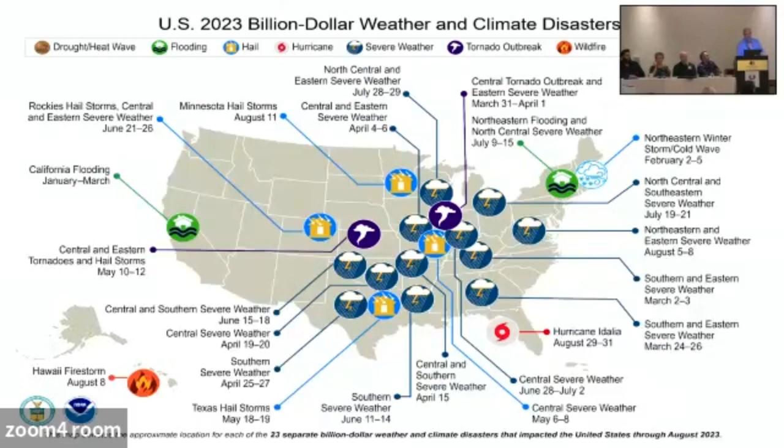We are working originally in the US and across the world, but we just need to work faster. Some of these things relate to rainfall, some are forest fires, we also have storm events. There's a number of things that are impacting us.

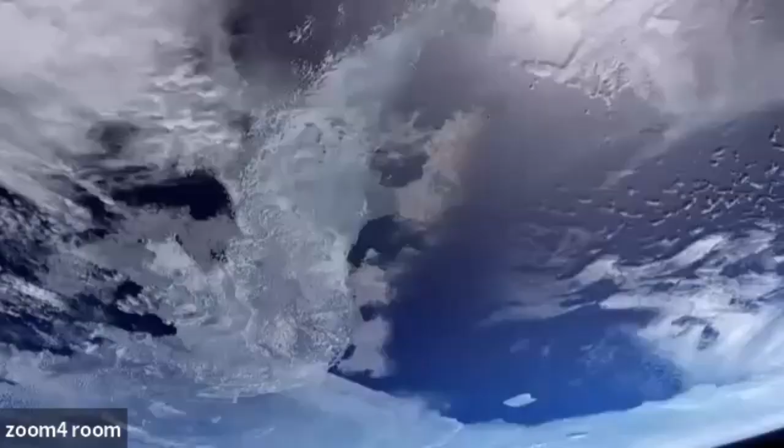So here's Mother Nature talking to us. Some call me nature, others call me Mother Nature. I've been here for over 4.5 billion years, 22,500 times longer than you. I don't really need people, but people need me. Yes, your future depends on me. When I thrive, you thrive. When I falter, you falter. Or worse. But I've been here for eons. I have fed species greater than you, and I have starved species greater than you. My oceans, my soil, my flowing streams, my forests - they all can take you or leave you. How you choose to live each day, whether you regard or disregard me, doesn't really matter to me, one way or the other. Your actions will determine your fate, not mine. I am nature. I will go on. I am prepared to evolve. Are you?

How's that? Ooh, oh, awesome. Thanks. Wow. Okay, I'm not Julia Roberts - tough act to follow, or Mother Nature, but so, who I am.

I am Joanna Papaevthimiou. I am the Oregon State Resilience Officer, which means I work in the office of Governor Tina Kotek, and I'm her policy advisor on disaster resilience and emergency management. I come to that work with a background in emergency management, 10 years at the city of Portland doing that work, and before that as a land use planner and community organizing around environmental justice issues. I want to talk to you today a little bit about housing resilience in the face of climate change.

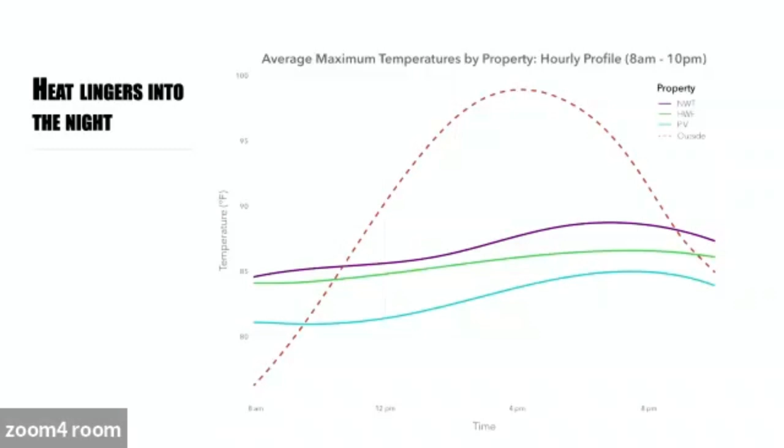No, that's really hard on the body, trying to not just put up with hot temperatures during the day, but also having to sleep through that heat. There's a lot of apartments that were experiencing this. So that was again the pretty strong takeaway for us, that this was really an issue to be concerned about.

And then finally, because this research project not only tracked temperatures inside the apartments, but it also was a partnership with residents, we shared temperature data with them. I'm not going to talk about the whole study, but I'll provide a link to it at the end. I think it's an interesting one. It was really a partnership with residents.

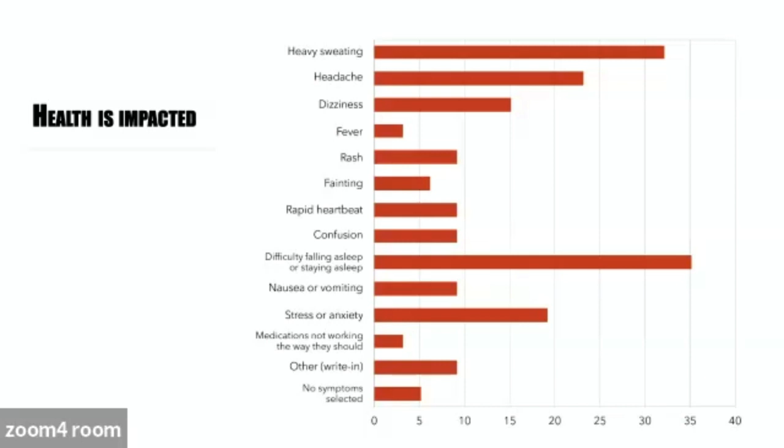So we also asked them about their strategies for coping with heat and how it was impacting them. And the majority of residents were strongly impacted by the heat, and people had trouble sleeping. People felt dizzy and nauseous, and also it contributed to a lot of mental health experiences of residents, because when you feel hot and anxious and you can't sleep, that impacts your overall well-being a great deal. So that's what we saw in these particular apartments, and it was really an important takeaway for us.

Also, as I said at the beginning, Shaylin and I and others came into this work coming out of the heat dome that I'm sure many of us here remember and lived through in 2021. We saw more than 90 heat deaths in Oregon due to the extreme heat that summer. That was such an outlier event for us. And so we were interested to see, to put that in the context of a more ordinary summer.

That was the following summer. But what we saw was that apartments are getting hot, really, not just in the heat dome, but apartments are getting hot in the summer, all summer long. And after that, I started paying close attention to heat deaths, and I imagine many of us did.

And what we saw is that, first of all, during the heat dome we talked about those 90 deaths, but if we look at excess deaths - people that are passing away, not that the heat is the sole attributable cause, but where it's a contributing factor along with other health conditions or underlying conditions - it's probably tripling the number of people that are dying of heat in the summer. And that's another reference I'll provide at the end.

So we could see that maybe not 90 people, but like 250 people died of the heat that summer. And if we extrapolate from that to other incidents, what we can imagine is that last summer, 14 people died of the heat, and already this summer, although the medical examiner reports take a long time to come out, we know there were 6 deaths at least in Oregon of heat this summer, and that doesn't include the excess deaths, just the ones that were attributed directly to heat. So that's a huge amount of people that are just having the worst impact from heat.

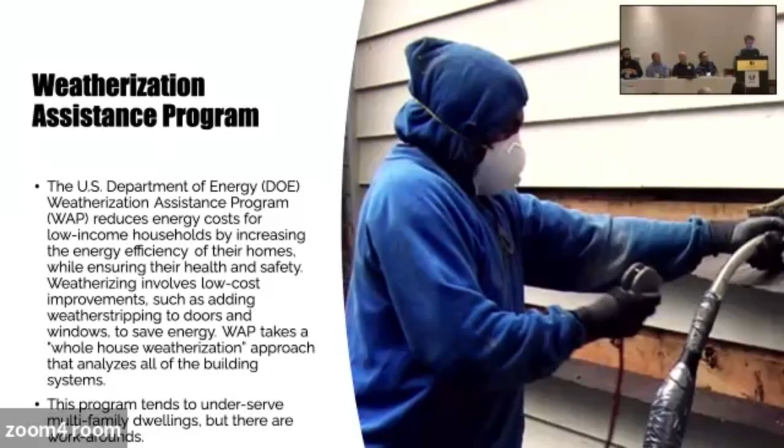Here in Oregon, the climate package that passed in the last legislative session, House Bill 3409, was a big climate package that included a packaging of incentives available to create healthy heating and cooling for all. The state of Oregon is doing a big push to put 500,000 heat pumps into housing in the next decade, prioritizing low-income and EJ communities, where that can have air quality and cooling benefits. It also brings down the cost of heating.

There's a whole bunch of benefits for people getting one of these heat pumps. And because installing 500,000 heat pumps is a lot of work—Shaylin can tell us installing even one can be a lot of work—it also has a workforce training program that will invest dollars back into the community for people to learn to do this work.

So I think those are all worthwhile programs. There's my contact info if you have questions or want to talk, links for the programs I talked about, and also the full report and some of the other research that I cited. I think I've taken up enough time. It was lovely to meet you. I'm going to pass it to the next presenter, which I think is Glenn.

Okay, following Julia, well, it's just hard for you. Following you was worse for me.

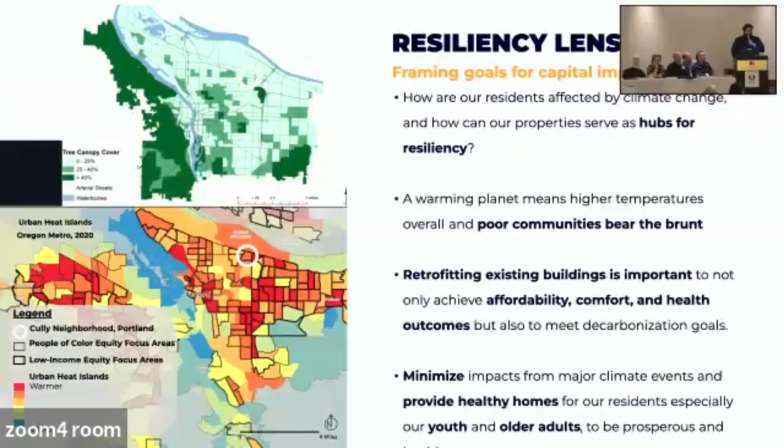So we wanted to do this exercise to look at a day in the life of one of our kids who live in one of our residences. So Julia's story - she's a 5th grade resident at Via de Rosas. She begins her day riding a fossil fuel bus to Scott Elementary.

I'm assuming it's a hot day, right? Even though it's late May, it's getting into the 90s because we know that warmer days are going to be happening sooner and sooner in the year. She's learning about the sun and that it can generate electricity, and she wants to become a scientist. She comes back to Hacienda's after-school program, Expresiones, and she's able to complete her homework in a climate-controlled environment.

At home, Julia is lucky because she lives in one of our properties that already has a mini-split system. So when she gets home, it's nice and cool, and she doesn't have to worry about the heat.

She gives her friend Bianca, who lives in Clara Vista Townhomes next door, a question about homework. She's wondering about a specific problem, and Bianca mentions that she's really struggling to focus on her homework because of the heat and how hot her apartment is, and she also struggles to sleep at night because of it.

So we're just doing this one exercise. We're realizing that one, there are inequities throughout Portland for folks, right? There's also inequities just within our portfolio, right? Just down the street, one child is having a different experience than the other. And that really imparted on us the need to upgrade these buildings to ensure that our residents aren't having to deal with these effects of climate change.

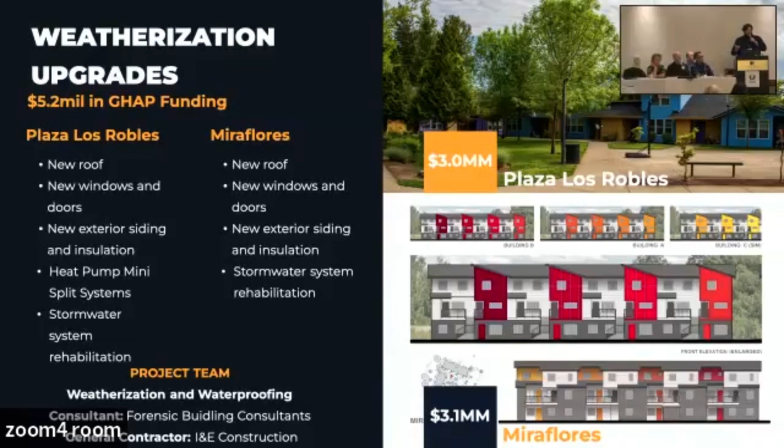And we're learning a lot by this in improving our existing properties, but we also are applying these same knowledge gathering and implementation into our new properties.

So Las Adelitas is a recent development in the Cully neighborhood that was completed in December 2022. It's all electric, it has rooftop solar, it also achieves an Earth Advantage Platinum, which I just know that we got confirmation today on. So that's great to hear.

But that was done a couple of years ago, and we're working on a new project, Dolores, in Hillsboro, and there's a lot more incentives that are now available, and also our own education is helping us achieve and identify more opportunities. So similarly, we're doing all electric, we're doing rooftop solar, but we know we want to generate more electricity.

So we plan to build an accessory solar structure as a carport. There's money now for battery backup, so we're looking towards that. And then also looking at Green Communities certification, just because it aligns better to our goals for this project.

So with that, I just wanted to say that these upgrades are really very reasonable and feasible for building owners to take on. You just kind of have to have the knowledge and the will to do it. So I hope that maybe you can take a little bit of inspiration back to your companies and organizations and build a more resilient Oregon. Thank you.

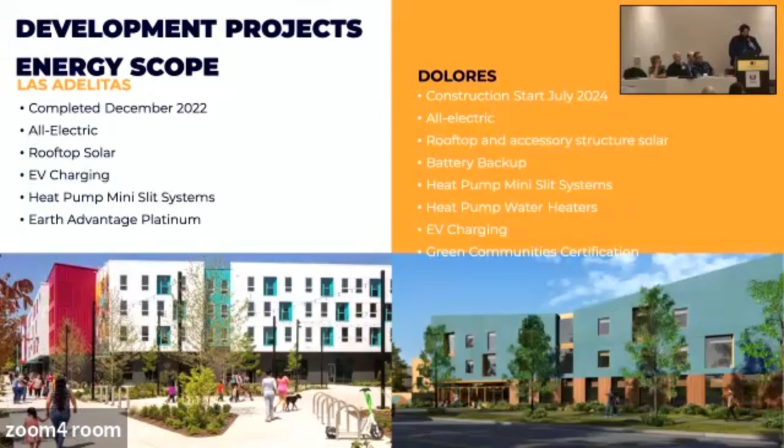All right, my name is Alex Boetzel. I'm with Earth Advantage, head of residential innovations there, but I'm really speaking to you because of my background as a builder, 30-year background actually. I want to talk a little bit about the strategies that lead us to some of those cool projects that we've seen, like the Hacienda does.

So quick question, who's involved in new construction, multifamily new construction? Any role? Okay, great. How about retrofits? And who has thought about resiliency measures in those endeavors? Okay, so it'll be a little bit of a recap, but I think it'll be interesting to see what do we consider.

And I'm going to skip over that intro, but what do we really need to consider when we talk about resilience? Because if you really pose that question, everybody has a different opinion on what that means or what we are really trying to address.

So here's what we've heard about needing to address: natural disasters, climate extremes, utility outages, health and safety, community well-being, long-term viability. All that is a concern, but really, when you set out to look at a project through the resilience lens, what are we really talking about?

So duration is one. Life safety and evacuation during an event—building codes take care of that now. But if you have existing buildings, will people be able to evacuate safely? Is that the duration we're talking about—just trying to get people out of the building?

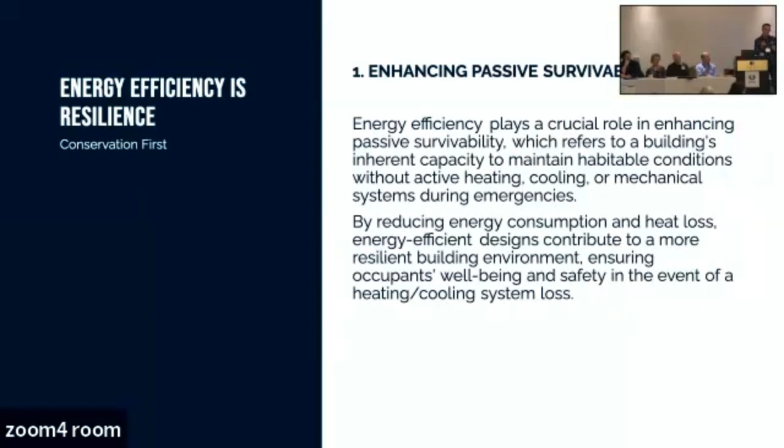So the idea is, if we have passive measures—and we're talking about what those look like—and reduce the impact of the weather on the building, we save energy and we become more durable and more resilient.

So once we've addressed all the passive measures, now we can talk about active measures. So that's equipment, right? Now we prepared actually for the really efficient equipment. Heat pumps - who's familiar with heat pumps?

Not every building can we just swap out the equipment, like gas boilers for heat pumps. We have to get existing buildings heat pump ready. In new construction, we have the opportunity to plan that in. But really, we have to address those efficiency opportunities around the enclosure first, and then we can talk about equipment. In addition, by reducing load and the draw of the equipment on the grid, we extend the capacity of the grid in severe weather events or other events.

So not only will we be able to better weather outages, but we might prolong periods before we even see an outage. You might know we have a certain draw on a power line, the power line heats up and sparks fires, and then we have a power outage. So we play better with the grid, meaning there will be more periods of time where the grid doesn't go down.

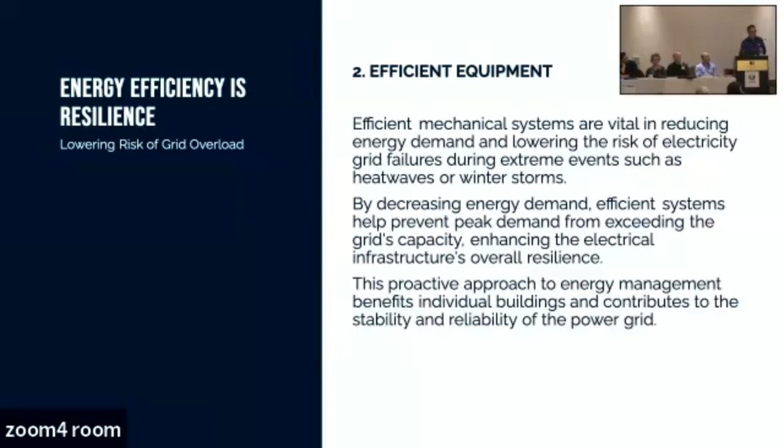And then finally, once we've addressed those two, now we can go to renewables. I sometimes call it eco bling - PV looks great, everybody understands how it works, but it really should be the last measure to do, once we've minimized loads on the property and the building, so now we have an opportunity to offset the rest.

Maybe even in combination with storage. And now we have what's often considered a microgrid, and we can even stay online during a power outage. I don't know if people are aware that you have to have storage to do that - just having solar panels, you cannot access the power in a power outage, because we need to protect our linemen down the line who might be working on the grid, and you don't want to backfeed. So you need on-site storage to be able to access it.

It doesn't need to be much anymore. So now we really only need batteries to be able to access it. If we're sizing everything right, we basically draw down the battery at night and charge it back up during the day, and so we go. Batteries are expensive, but it doesn't have to be much anymore.

Most of you are probably familiar with this - just want to go really quick through it. Some really low-hanging, no-cost items potentially: how do you orient my building, what's the massing - more compact is more efficient. There's opportunity by orientation to take advantage of the weather and natural climate conditions.

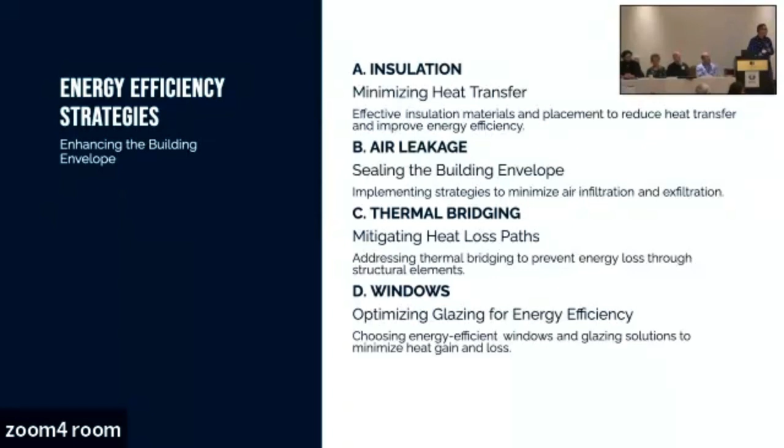Okay, so now the systems—heating and cooling. We need to be able to do both, so heat pumps to the rescue, they do both. That's perfect. Ventilation and filtration, right?

So if we have a smoke event, what do we do? We don't bring in outside air, right? But what happens at 2,000 ppm—anybody knows we want to be around 400, at 2,000 I can see people's eyes glazing over. So we can't just do that. We have to bring in air.

So we have to ventilate. And what do we have to do? We have to filter. I have to balance indoor pollutants with outdoor pollutants, which is not easy, but that's something we have to address.

Water use and hot water. So water use as a whole—we're seeing a permanent drought, so how do we reduce water use? Which then also helps in an event, because if we use less water, there's less water we have to provide.

Hot water specifically is something we want to address with heat pumps, which is still kind of difficult to do in multifamily. But the technology is there—it's not the technology that's the problem, it's typically the implementation, because we have to think differently.

Just like getting a building heat pump ready, we essentially also have to get the team—the team that installs the system—heat pump water heater ready, because it's a little bit different in the way we have to think about it.

And then finally, efficient appliances. We all know there's an opportunity there. And by the way, now we're all electric—if we go to electric cooking, we're all electric, we have less indoor pollutants. And we're perpetuating this: we reduce loads, so we reduce energy demand, we reduce emissions, and we reduce the consumption of fossil fuels.

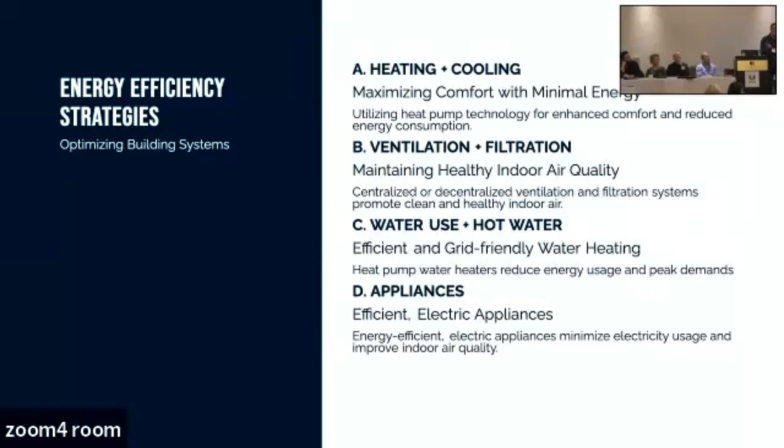So not only are we getting cheaper bills and becoming more resilient, we also help reduce emissions so that what we're trying to cope with doesn't become more severe.

This is another one of my favorites: commissioning. So now we have all this nice equipment—PV, heat pump water heaters, ductless or central heat pumps, whatever—it needs to be commissioned. Someone has to look at it and say, is it performing, is it doing what we intended it to do? Nothing works like it's intended to perform right out of the box, so to speak.

So that's super important, particularly with heat pumps—they really have to be dialed in because they're sipping energy. A heat pump is moving heat, not making heat, and if there's little heat outside in winter, we're moving little pieces. So if they don't work as intended, there's frustration, we get complaints, and worst case, public perception might change and people think heat pumps don't work.

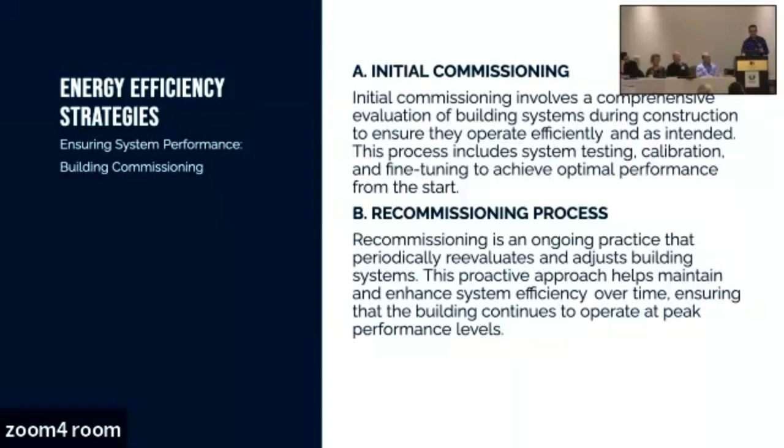And then recommissioning—commissioning is so important that you have to do it again, at whatever interval. Talk to your teams about how often this should happen: 5 years, 10 years, but it has to happen. This is particularly true if you have turnover with facilities personnel who might not understand how to service this equipment—they need to really keep an eye on this stuff. It's not set and forget; you have to tend to it.

Okay, finally, sheltering option. That's really essentially what we're talking about, or where we started, right? So how do we shelter people in place? There's some design considerations here. If I can't afford to upgrade my entire building, can I create safe zones? Is there areas, we heard about the term cooling hubs or cooling areas, right?

Is that something we can create? We have to make sure, okay, how do we ventilate? Again, if you can't afford to ventilate the entire building, ideally that's what we do. But if we can't do it, is it in certain zones? Entrance control is just like, okay, if the power's out for several days, how do we make sure we keep our people safe? Supplies and equipment, like create spaces where you have equipment that you need in an event.

So now we're going beyond specifically the building and design. Besides that, where are those spaces? Where is the stuff and how do I get to it in an event? If you just put it in some back corner because that's where you happen to have room in your design phase, you might not be able to access it if there's a certain event.

And then communication systems, right? It's obvious, how do we stay in touch? And there's a lot, I guess, where Glenn is going to help you both on how to equip your emergency supplies and how to stay in touch.

And then specific strategies, power outages, we talked about, like ideally you have backup power, so solar with battery combination. Emergency lighting again seems like a no-brainer, but in an existing building, check, because people can really get hurt. If you have an event where people are in a rush, they don't pay attention, so we have to have emergency lighting.

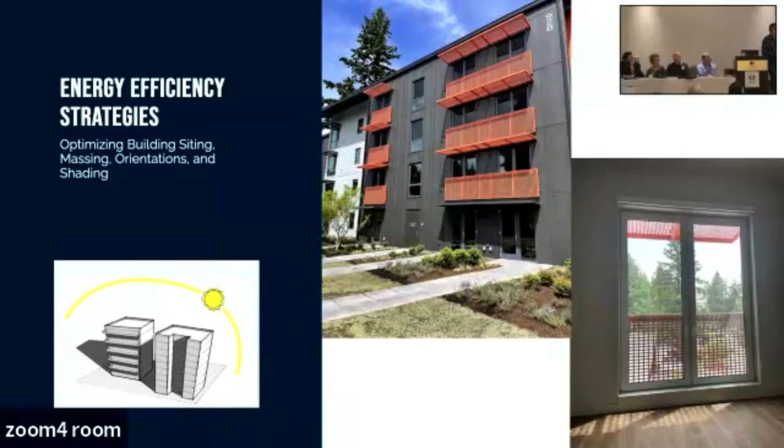Okay, here, there's some shading strategies, right? Really simple, what we can do, like permanent shading. If it's designed properly, we can harvest sun in the winter, low sun in the winter, but keep it out in the summer. You see how the effect on the bottom right there, it really works really well. You just want to go through it.

Exterior insulation is kind of the measure that we do to upgrade envelopes, both for thermal bridging and additional insulation values. This is a great example, this is New York, it's a townhome, a brownstone, but spot the difference, right? This is infrared, I think people are familiar, right? High, light areas, these red areas are heat loss. The darker the area, the more we are conserving energy. This is a retrofit, right? This is what can happen.

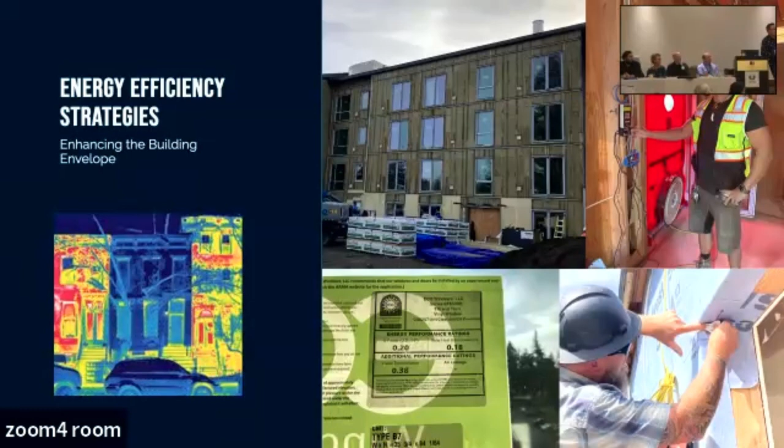On the bottom right, so getting the building airtight, there's a few measures that have to be considered. It's not magic, it's just more a sequencing and training issue. We're already utilizing materials to get there, we just have to install them properly. You want to do the next one?

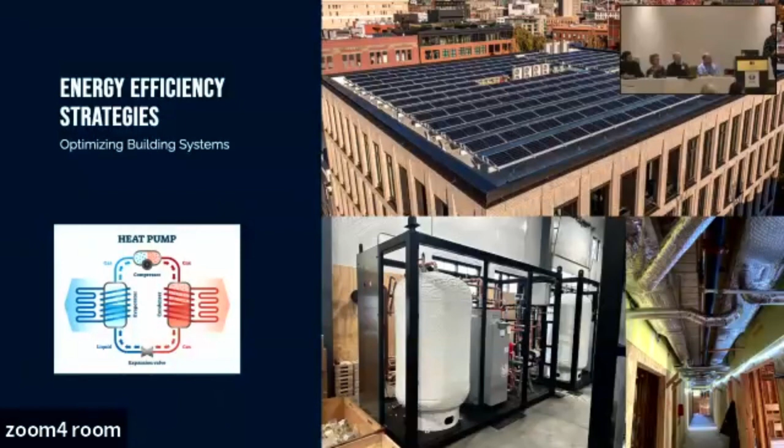A little bit of an action shot in this building where you see ducting - when we talk about ventilation or cooling, how do we get to each unit? Typically we have cadet heaters, but what do we do about cooling and ventilation? Well, this is what this could look like. This project actually provides cool, tempered ventilation air to each of the units.

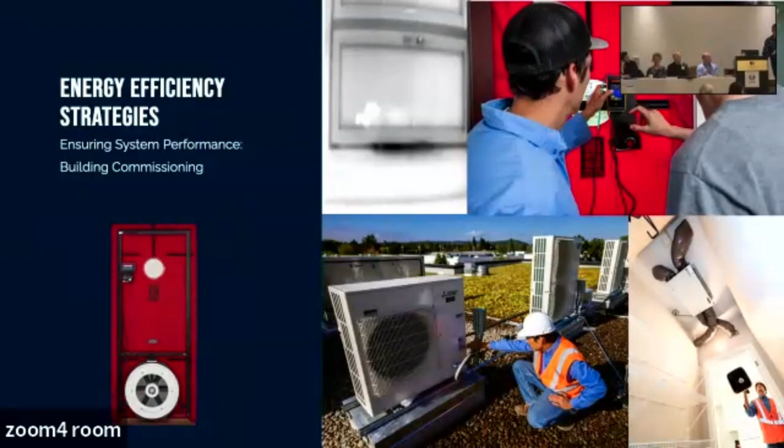And then commissioning - super important, right? Blower door test. We're commissioning the envelope, making sure it's actually airtight, and then making sure this equipment really works. Okay, I think that's it. All right, thank you.

I'm going to roll through this fast for the rest of you because I actually have a slide deck from the GRRP's HUD weekly meeting. It's 35 slides for later, so it's just going to be a reference document.

But there are 3 cohorts that you can pursue - $40,000, $60,000, and $80,000; $750,000, $10 million, and $20 million. There are sections throughout the 12-month period. We've already gone through those first couple cohorts, so I have a couple of those slides in this deck, but I'll go through them fast, and then we can get to some of the other questions and answers a little bit later on.

One thing on here - apparently the slides are missing, interestingly enough, thermal comfort, which is kind of hilarious given what we're seeing and feeling right now. But we have homes that are places for shelter and also for comfort. And we obviously spend about 90% of our time indoors, so air quality matters, and we can't see those particulates.

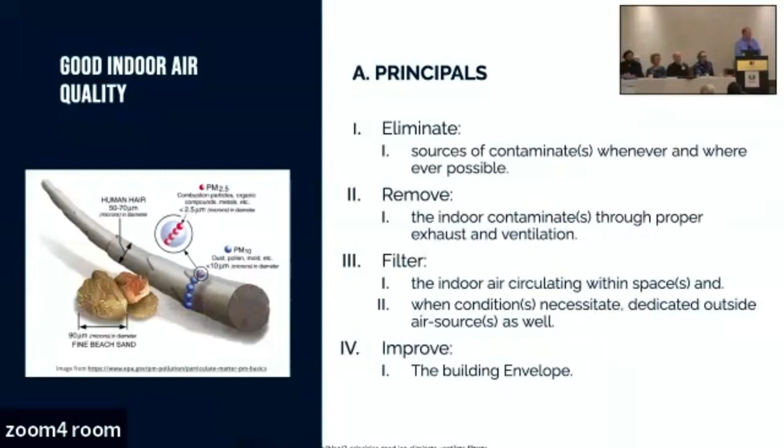So what's going on? We're sharing air right now - obviously the ventilation system isn't super great here, so we're sharing with our neighbor. But there are some strategies for filtering out, and some of these are strategies for eliminating, removing, filtering, and improving these bugs at different levels.

One of the things we wanted to bring as a demonstration we can look at later is from our first events - I don't know if we had several in 2021. Some people had filtration, and you probably still felt the thick air. We had some of the worst air in the world at that time. This is a device you can make for a fairly cheap price - it's basically a box fan, 4 MERV 13 filters, and some tape.

And then we've got an upgrade that's happened in the building science world, because there are spaces on the corners of these box fans which actually pull the bad air back in and then push it back into your room - we call that a shroud. So you can look at what that looks like to make it a little more efficient.

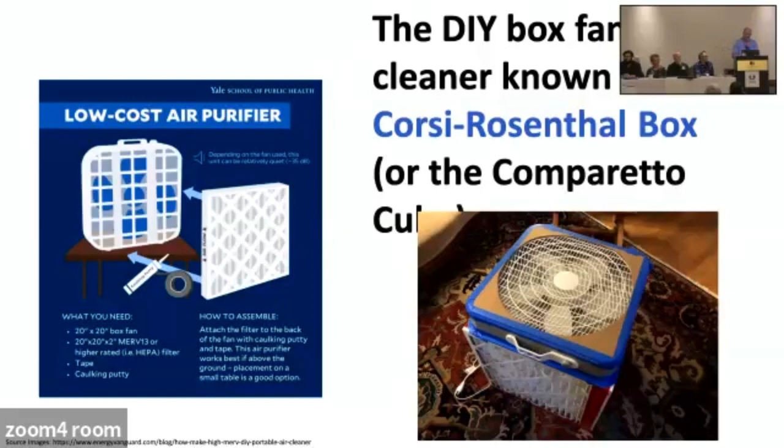In addition, there are some other things - we're getting close to the winter season, so we're going to be checking our CO monitors and fire monitors to make certain those function in those spaces, because we're going to be spending more time indoors using heating elements. Some of those are still fossil fuels, and we have to make certain we're safe for our environment, the habitants.

This presentation is available both here as part of the presentation we're giving, as well as online. It's very clear about a lot of the questions from those I've been attending, about what projects actually apply - it is Davis-Bacon applications for everything, just be mindful of that. I'm going to zip through these things, pause for a second on one or two slides, and then move forward.